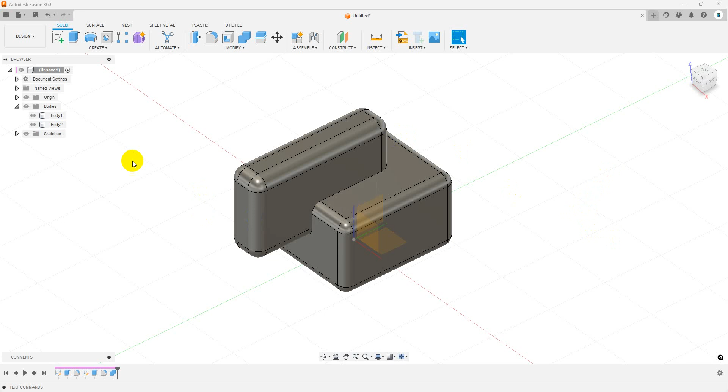So you're getting ready to 3D print your model, and you have pieces that need to fit together like we have here. If you need pieces to fit together, one of the things you have to do on your 3D printer is you have to figure out what kind of tolerance you need in between these pieces.

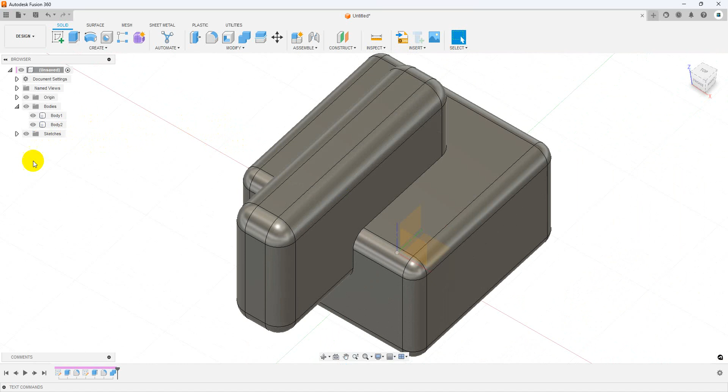On my printer, I found that roughly 4 thousandths tolerance total is a really good number. Pieces fit together pretty well, pretty snug. So to do that, what you want to do is the pocket that your piece is going to sit in. Once you figure out that number, and you can actually try different numbers to figure them out on your printer. As a matter of fact, that's one thing I would suggest doing.

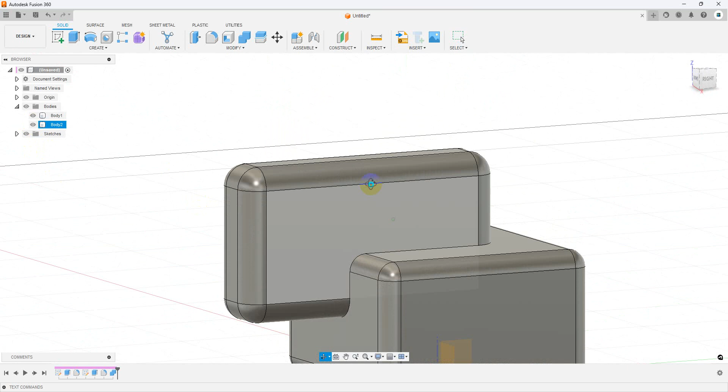Make something really simple like this up, and then after you make it, just go ahead and start offsetting the faces until you get a really nice fit. You can actually do like 3 or 4 offsets, print them all at the same time, and just see which one's the best.

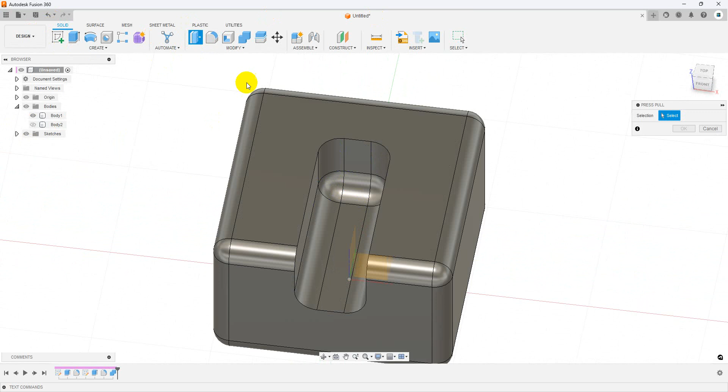So in this case, I want to show you how you can do the offset to get the gap in between the two pieces. So up here under the solid modeling, we have press pull. If we go through and we select all the faces, once we select all the faces, you'll notice you have a number here and an arrow.

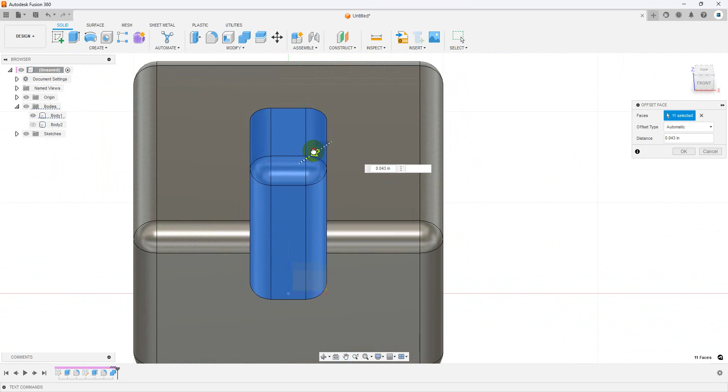If you pull this arrow in, it makes it smaller. Well, that's not what we want. We want to go larger, so we need this to be a negative number in this case. So once you drag it out a little bit and you get a negative number, now I need 4 thousandths, but that's 4 thousandths total. So that's going to be 2 thousandths all the way around.

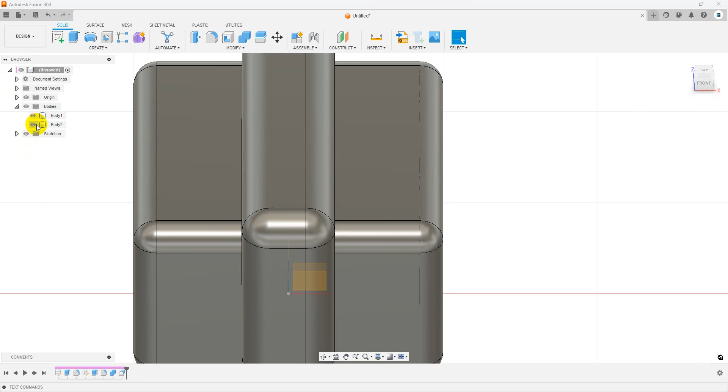So basically I just put that 2 thousandths in here, I hit enter, and now when I bring my part back, now I have a really, really small 2 thousandths gap around there, so my parts will fit when I print them out.

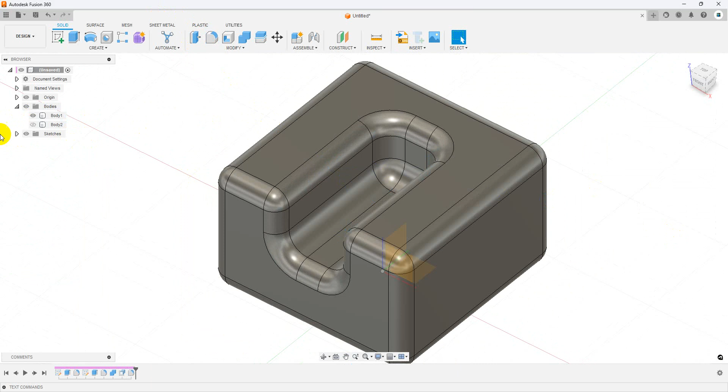Another thing that I want to point out is that after you cut things out, leave your fillets till last. So once you figured it out, then I would go ahead, put your fillet on there, and then you're done. Thanks for watching.